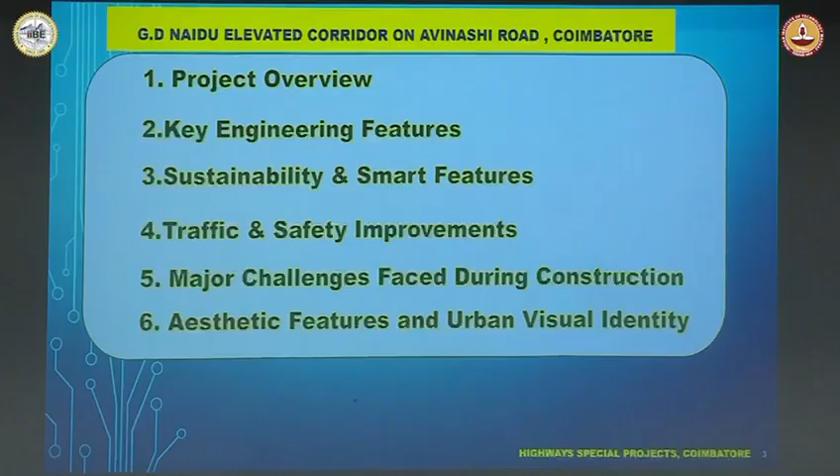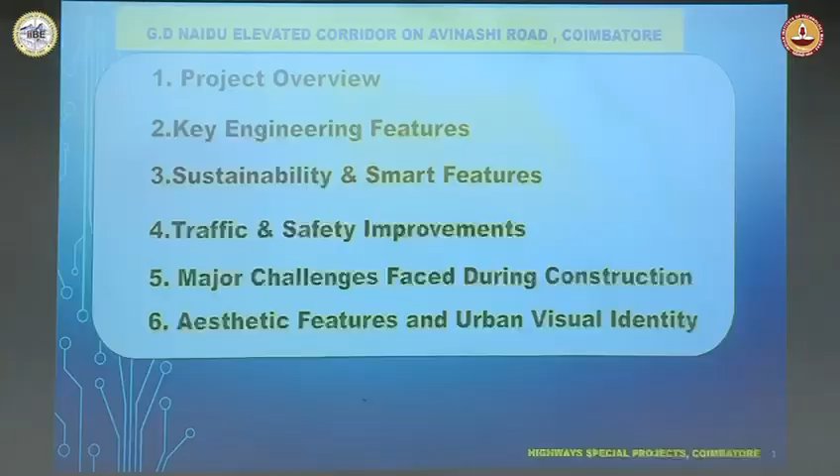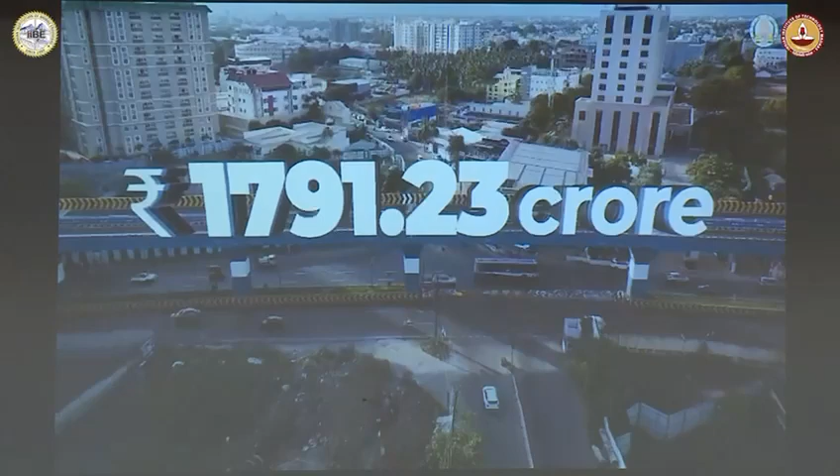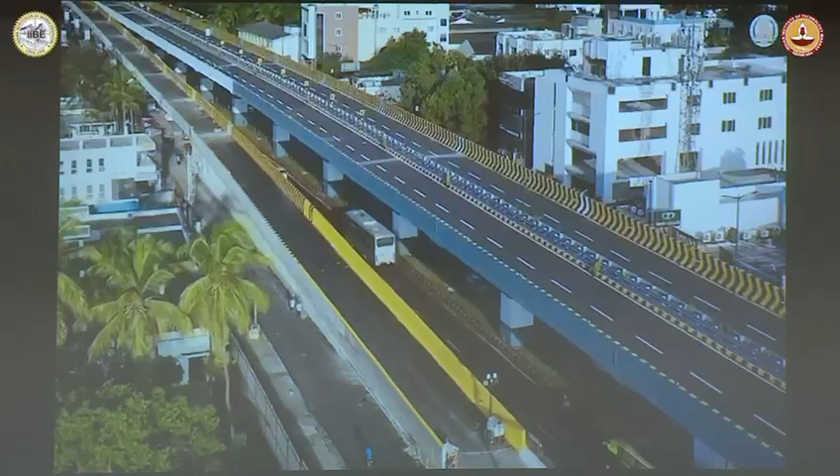Coimbatore, a city that has excelled in education, economy, industrial growth, and many other areas, and has earned several distinctions for itself, is now set to reach even greater heights with the establishment of Tamil Nadu's longest elevated bridge. This project, executed by the Highways and Minor Ports Department, spans 10.1 kilometers from Goldwins to Uppilipalayam at a total estimated cost of Rs 1,791.23 crore. This elevated structure includes a 4-lane elevated expressway and a 6-lane ground-level road, totaling 10 lanes. The flyover has entry and exit ramps at 4 major points: Coimbatore Airport, Hope College, Nava India, and Anna Statue, making it highly accessible.

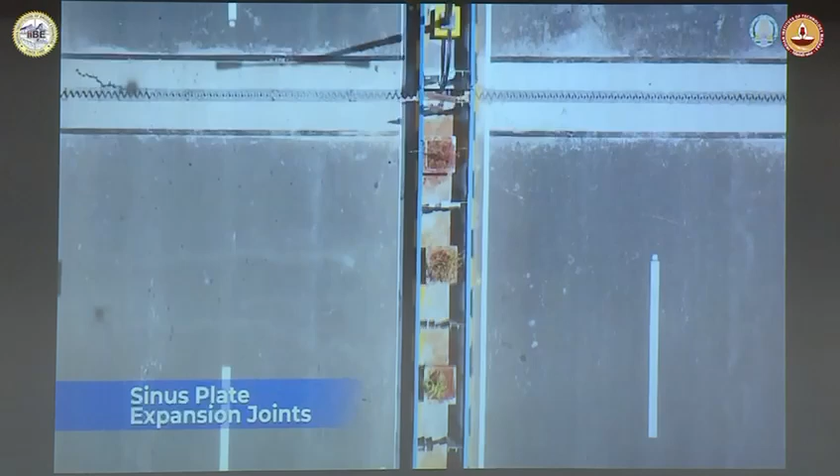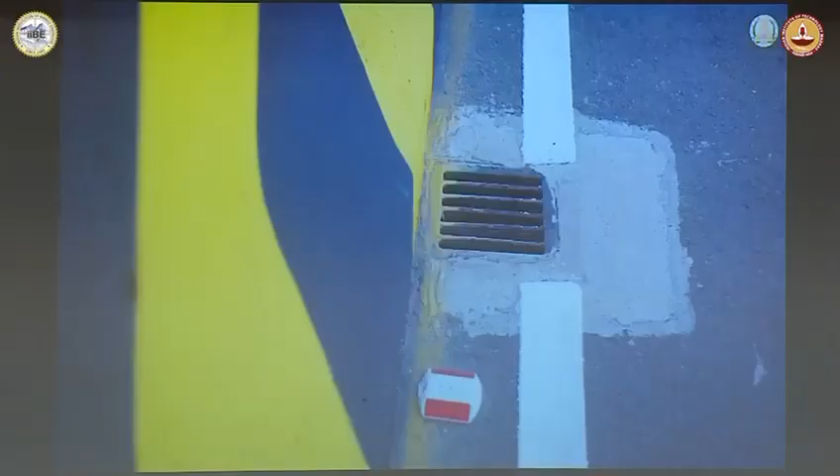One of the key features of this project is the incorporation of advanced sinus plate expansion joints, a new technology designed to ensure smooth travel, reduce noise, and increase vehicle lifespan. The project also includes facilities such as a footpath cum drainage system, safety walls, traffic signs and information boards, roller crash barriers for enhanced safety, electric street lights, and RGB decorative lighting. For the first time in Tamil Nadu, a pioneering rainwater harvesting system has been installed at every span of the flyover to enhance the groundwater table, and a secondary railway overbridge span constructed with steel girder and concrete slab has been built for 52 meters where the structure crosses railway tracks.

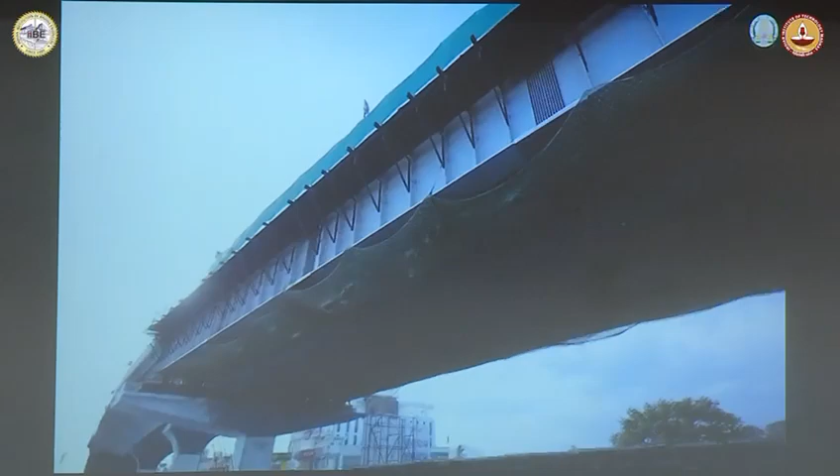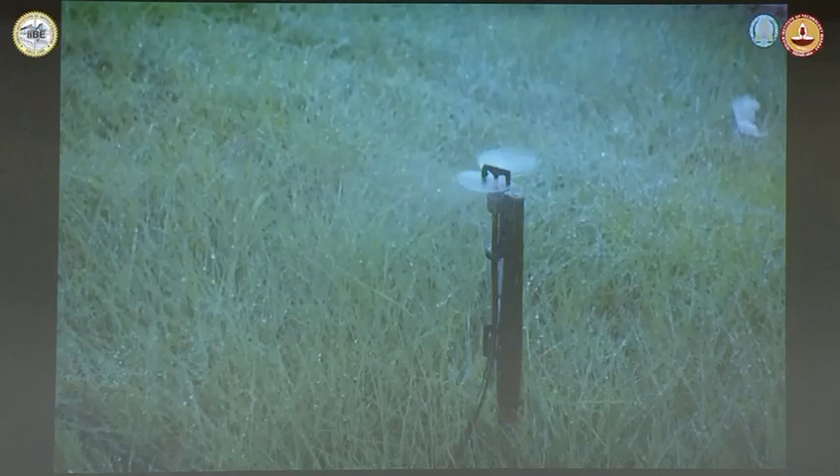To preserve the environment and beautify the city, landscaped medians and decorative plants and grass have been laid between the elevated and ground level roads. These green spaces are supported with drip irrigation systems and sprinklers for regular watering. With all these remarkable features, this flyover is set to become a landmark of Coimbatore. It significantly reduces travel time from the city to the airport from 45 minutes to just 10 minutes. This project will contribute immensely to fuel savings, pollution reduction, improved efficiency, and promote growth in commerce, industry, education, tourism, and medical services. We express our heartfelt gratitude to the Honorable Chief Minister of Tamil Nadu for swiftly completing the construction of this highly special bridge and for inaugurating the flyover by naming it GD Naidu, a close comrade in arms of Periyar's principles and India's Edison, who brought glory through new scientific discoveries. Thank you.

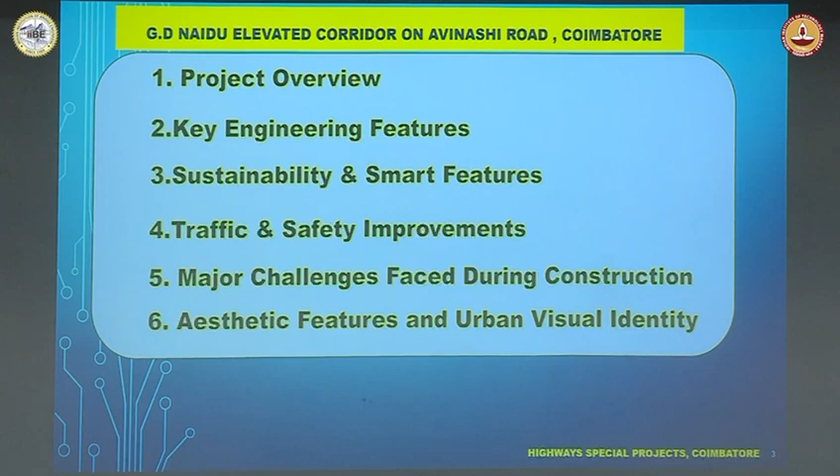Now, in my procedure, rather than discussing the design views, I am going to discuss the project overview and the major features and major hurdles we encountered during the execution of the project. I have divided this into 6 parts: project overview, key engineering features, sustainability, traffic, major challenges, and aesthetic view of this project.

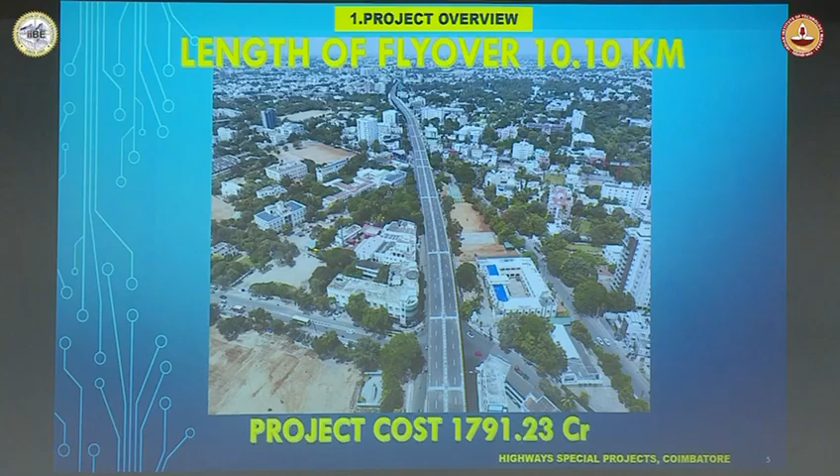Coming to this project, it is one of the longest projects in India, and the longest in Tamil Nadu at 10.1 kilometers, with an estimated cost of 1,791.23 crores. As shown in the AV, the elevated corridor has a top elevated level of 4 laning, and the at-grade levels have 6 lanes, totaling 10 lanes.

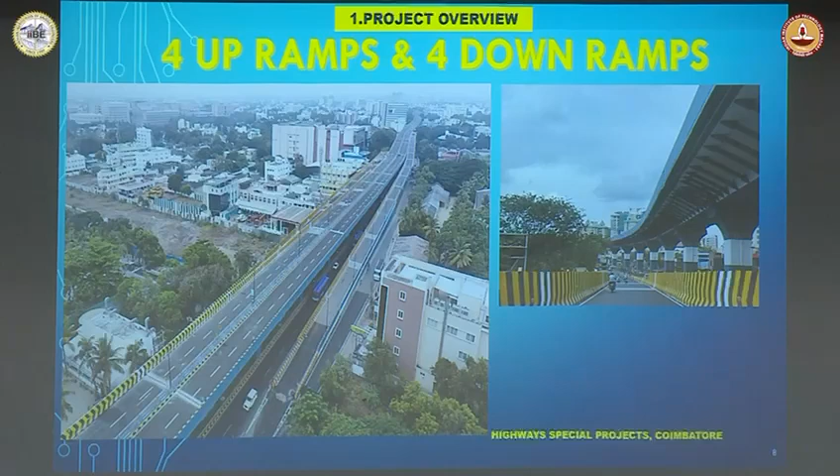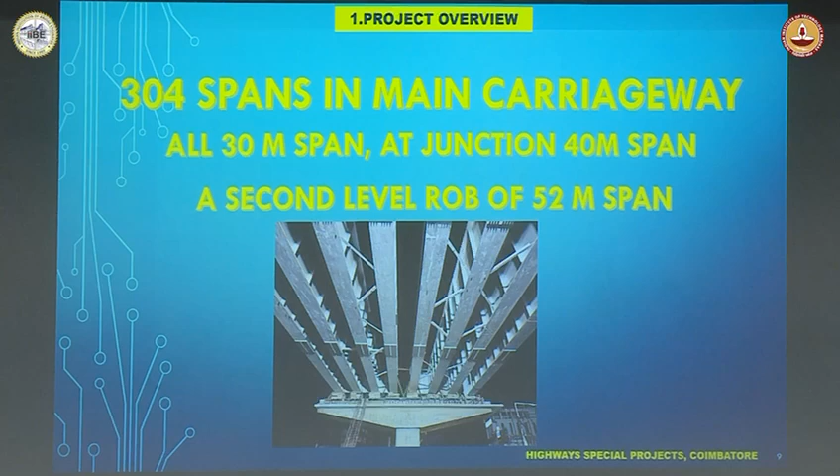We have 304 spans in the main carriageway, and everything is a 30 meter span. All normal spans are 30 meters, and in critical places where junctions are located, we have increased the span to 40 meters. Only at one ROB portion, which is a second level ROB, we have gone for a 52 meter span.

The project started in 2020 under an agreement period of 4 years, but we completed it within 4.5 years and opened the full stretch to traffic, inaugurated by the Honorable Chief Minister of Tamil Nadu during October 2025.

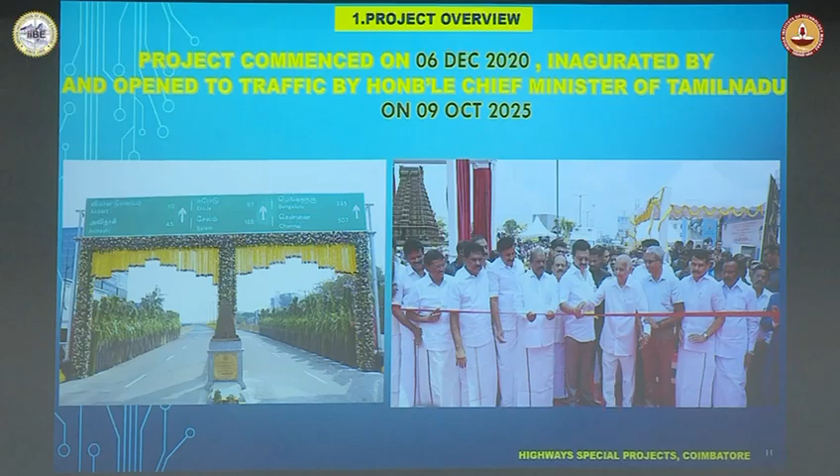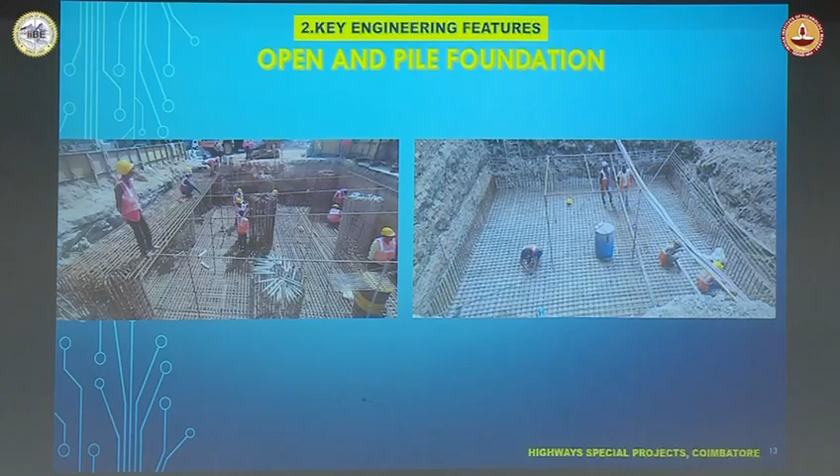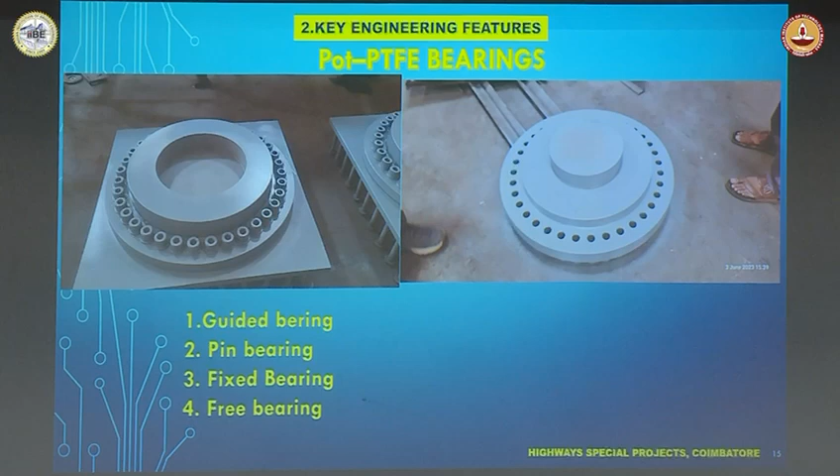Now coming to the key major engineering features, we have both types of foundation, open foundation and pile foundation, as per the subsoil particulars. We carried out pile testing, and for bearings, we have used all types: guided bearings, pin bearings, fixed bearings, and free bearings.

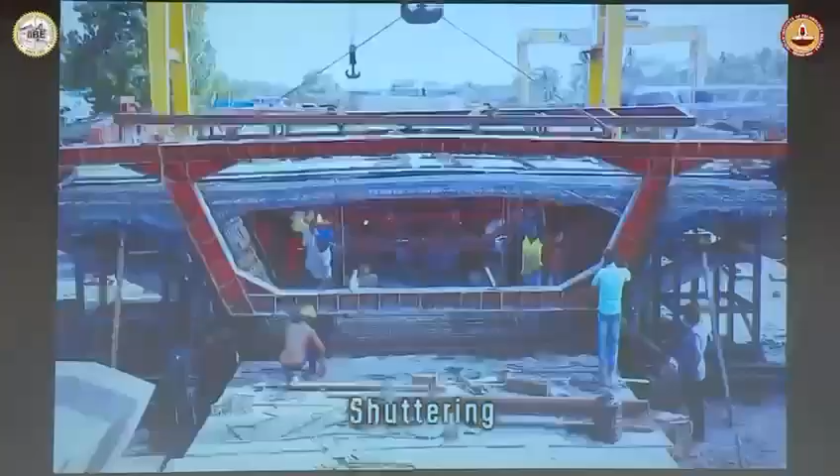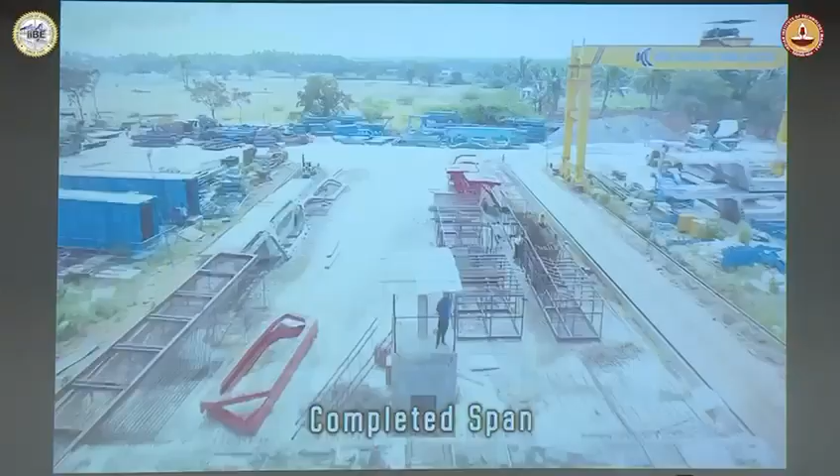This is an AV showing the fabrications. It is made up of a structured box girder, a strutted box girder, already pre-stressed. The total span length is 30 meters, divided into about 12 segments, which were cast in the yard and brought to the site.

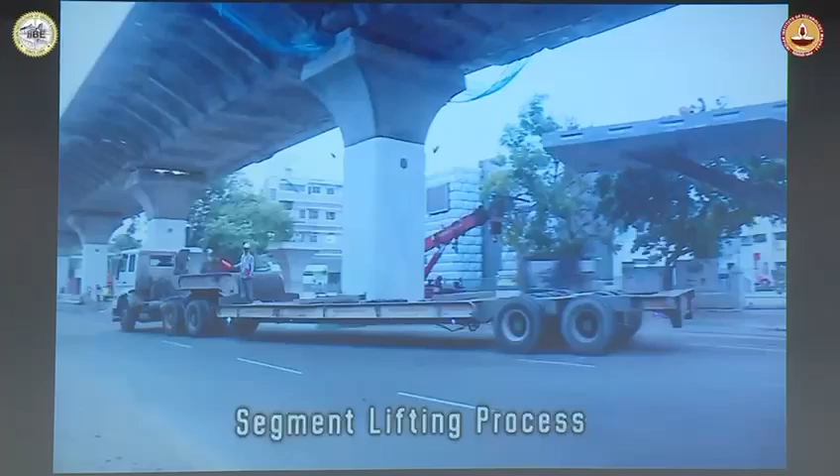This shows the lifting process and this is the transportation of the segments.

Now coming to the major key engineering features, we have the sinus plate expansion joint. Usually, ordinary expansion joints, such as comb plate or strip seal expansion joints, give noise even when the surface is leveled. But here we are using the sinus plate expansion joint, which follows a sine curve, so when a vehicle moves from one deck to another, there is no disturbance or noise at all.

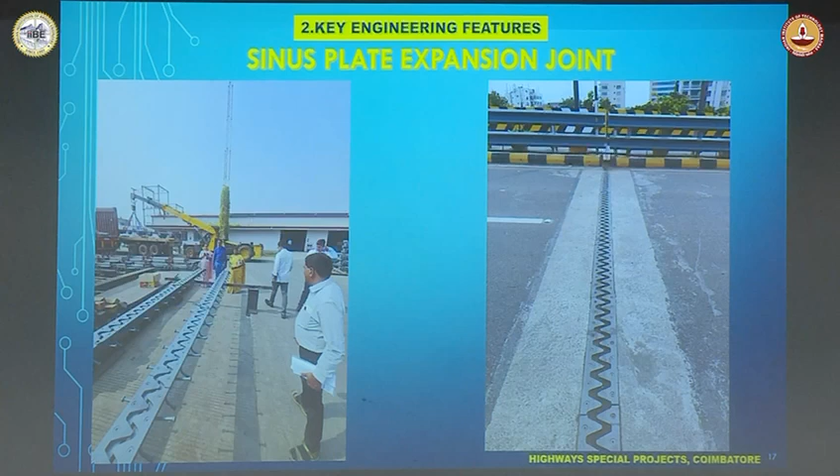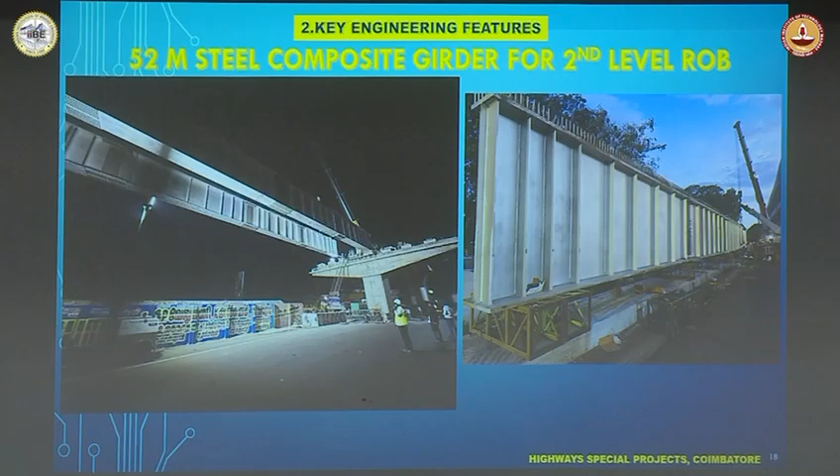Apart from that, we have one span of 52 meters for the railway span, a second tier railway span, using 52 meter steel and composite girders. We also have RE walls for all the ramp portions.

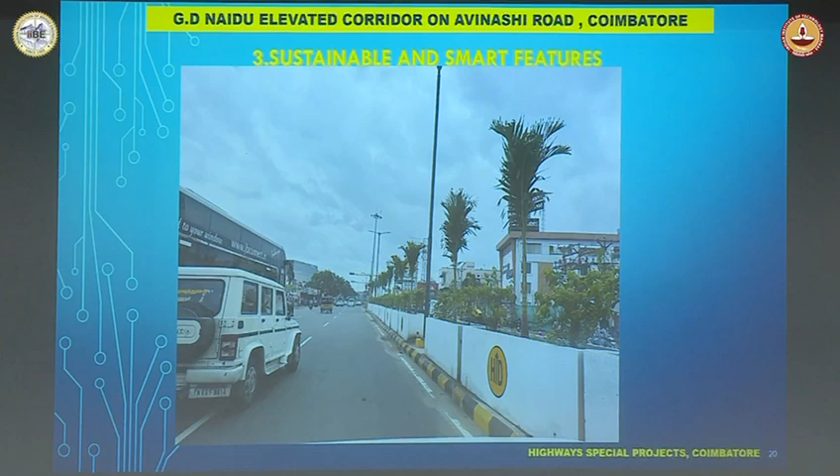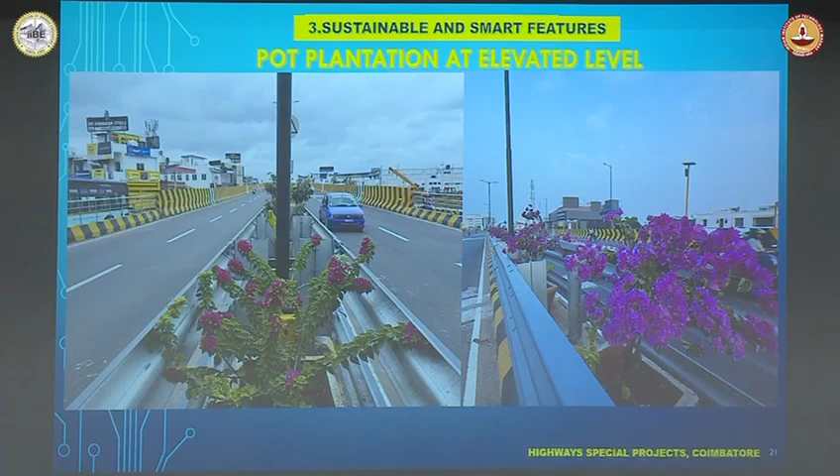Now the next point is sustainability of our bridge. Usually nobody concentrates on sustainability, but we have focused on this. First, we placed pot plantations at elevated levels, around 3,000 to 4,000 pots, and raised plants over them. Also at the at-grade level, we have greenery plantations.

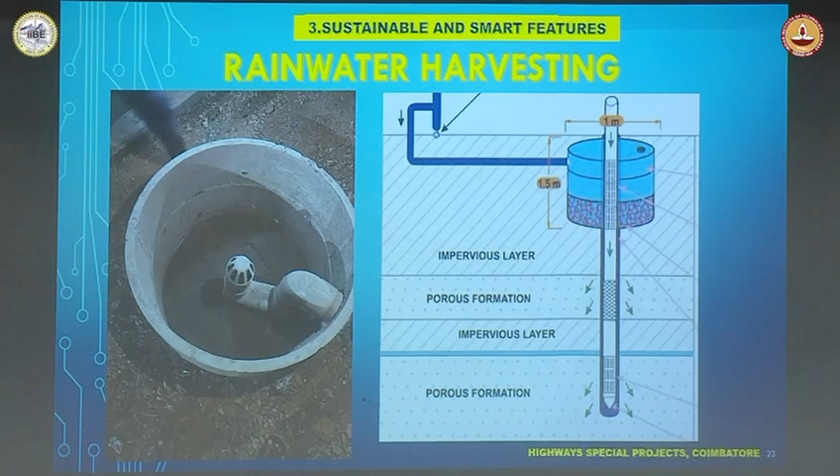We are the first to introduce rainwater harvesting in all the decks of the flyover, placing about 240 rainwater harvesting units, which was recently awarded by the President of India, who gave a memento to the district collector for this.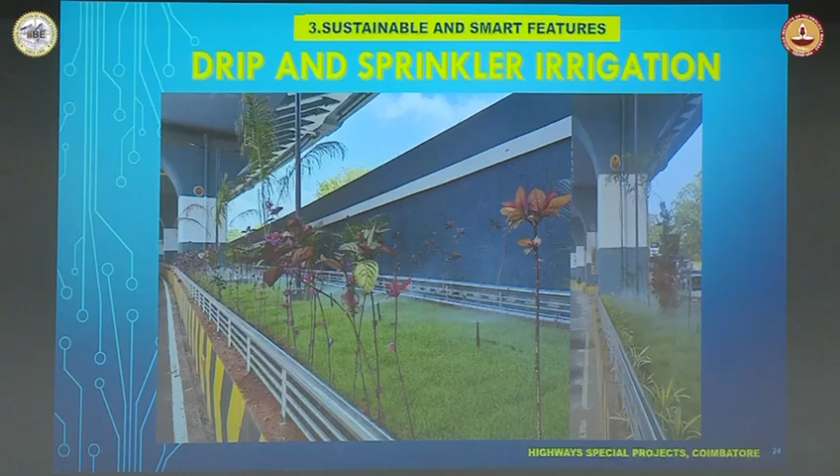Apart from this, we have drip irrigation and sprinkler irrigation to avoid wastage of water, since because of the heavy congested traffic area, placing tanker vehicles is not possible, so we went for drip irrigation.

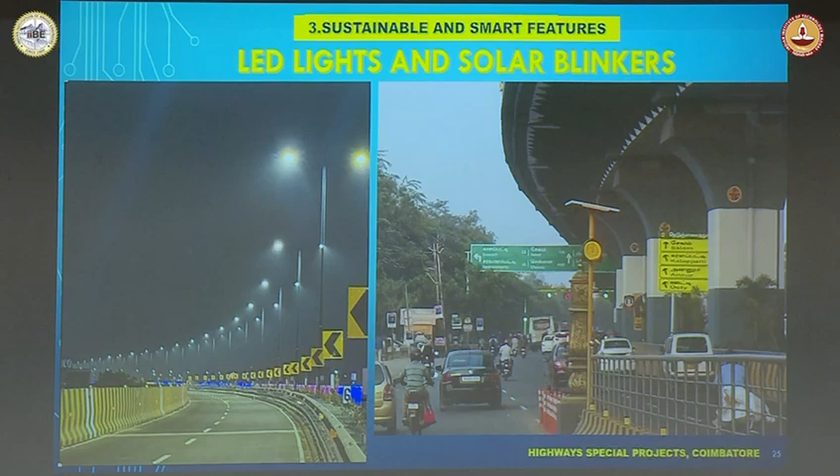Then for sustainability, we use LED lights and solar blinkers. To use electricity effectively, we are using LED lights and solar lights. Now, moving to traffic and safety improvements.

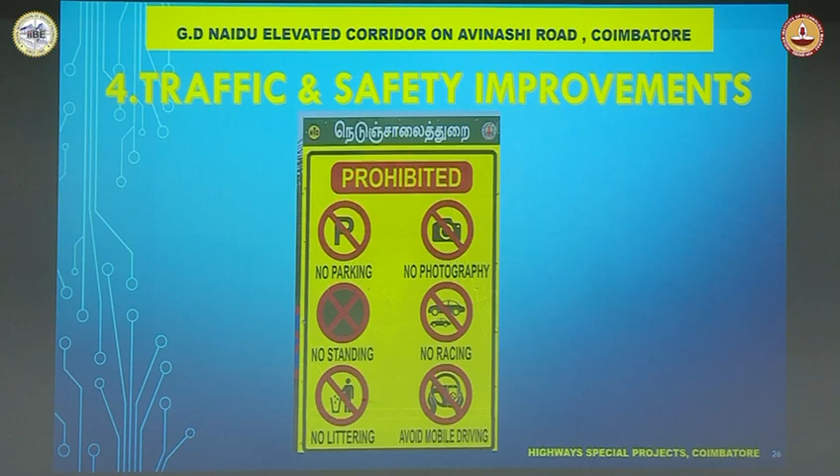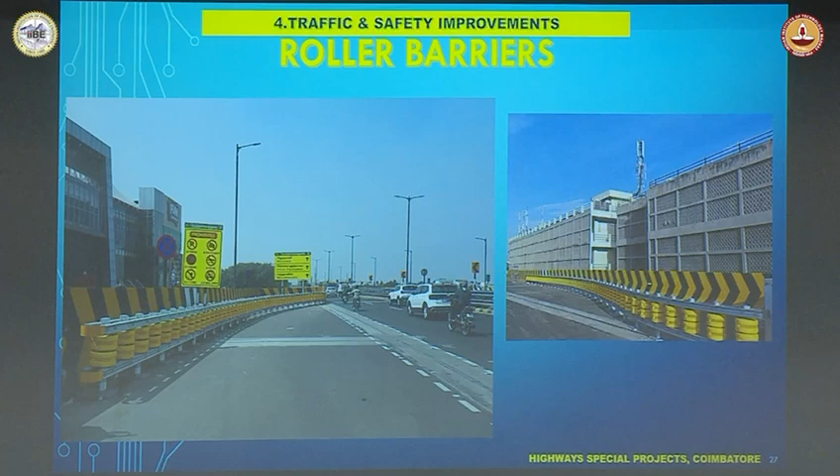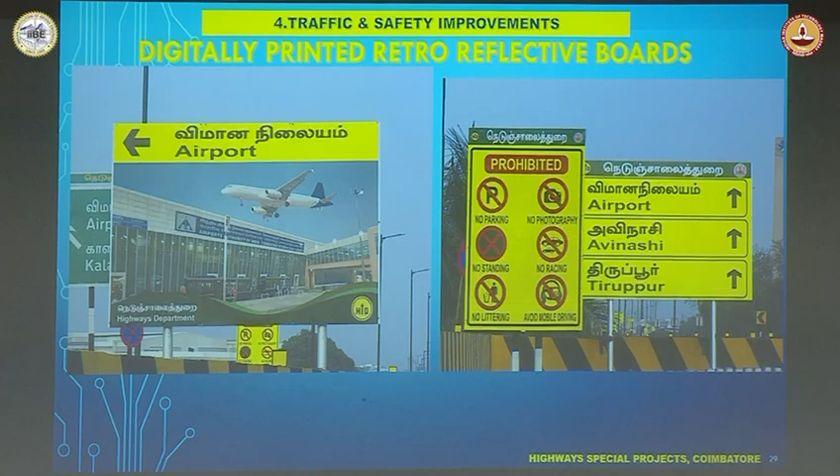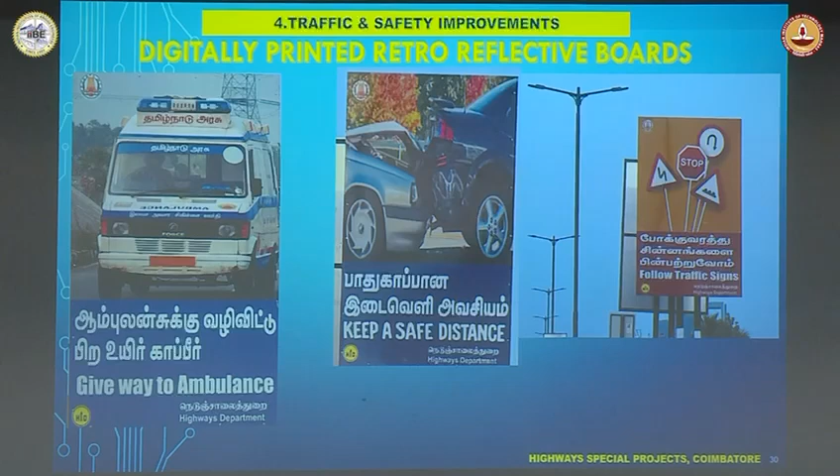Apart from this, we are having high containment crash barriers of 1.5 meters height. We have also provided digitally printed retro-reflective boards for easy night and day visibility, visible even from 500 meters distance. So for ambulances, they keep a safe distance using these information boards. All are retro-reflective digitally displayed boards we have placed. Apart from that, we have done chevron boards and reflective markers for night visibility.

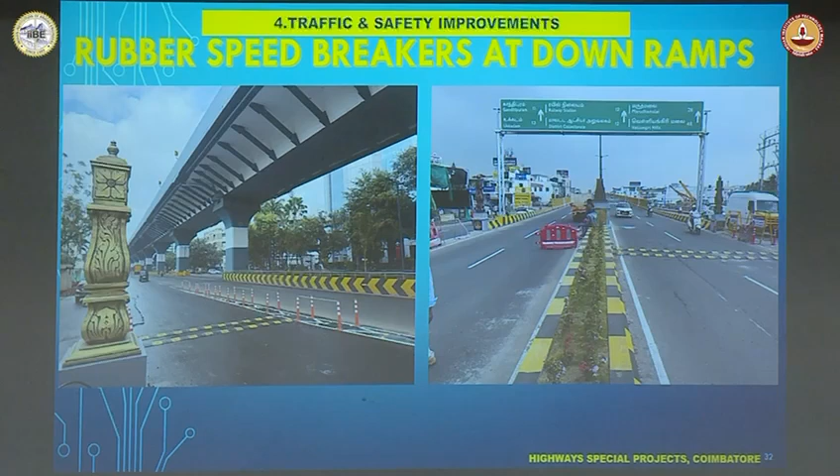Then this is a rubber speed breaker, which is a temporary arrangement, and we are going to provide an artificial intelligence camera over this very shortly.

Then the challenges - the main thing is there are so many challenges because it is a densely populated area. The first one is a land acquisition issue. Before that, so many court cases were there, but we have succeeded in all the cases, and we have completed the cases and started the works.

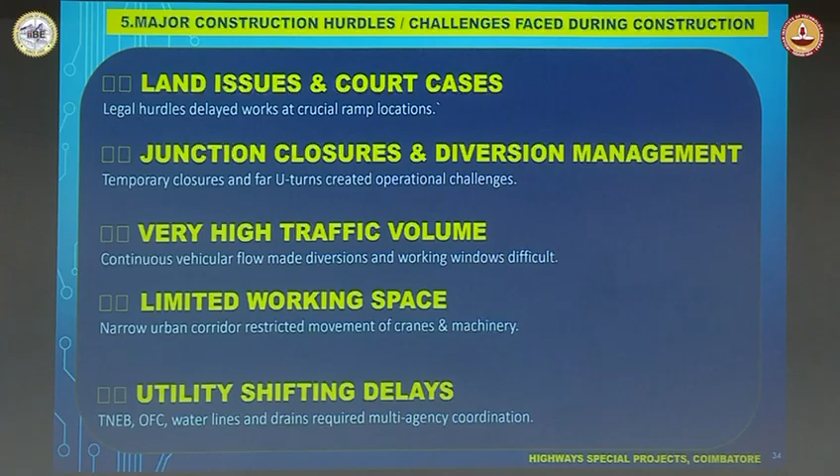Then due to junction closures and high traffic volume, limited working space and utility shifting delays, we have faced challenges and overcome everything. Also during night work and COVID-19 safety, girder launching, and approval from railways, we had so many hurdles, but we have undertaken everything and succeeded easily.

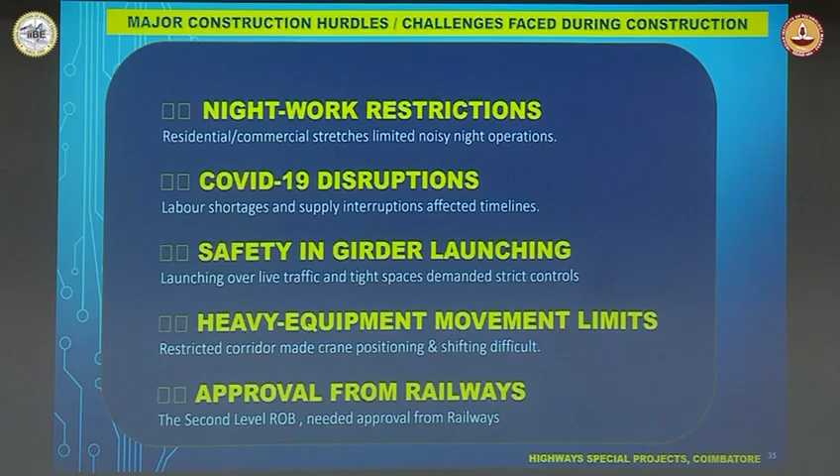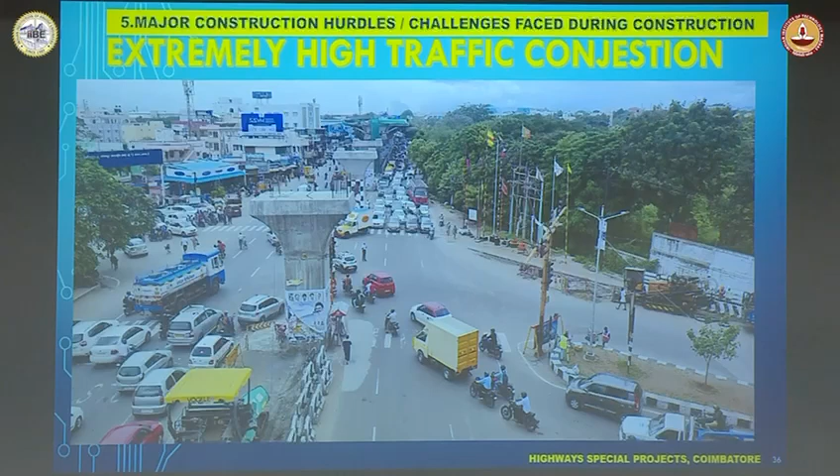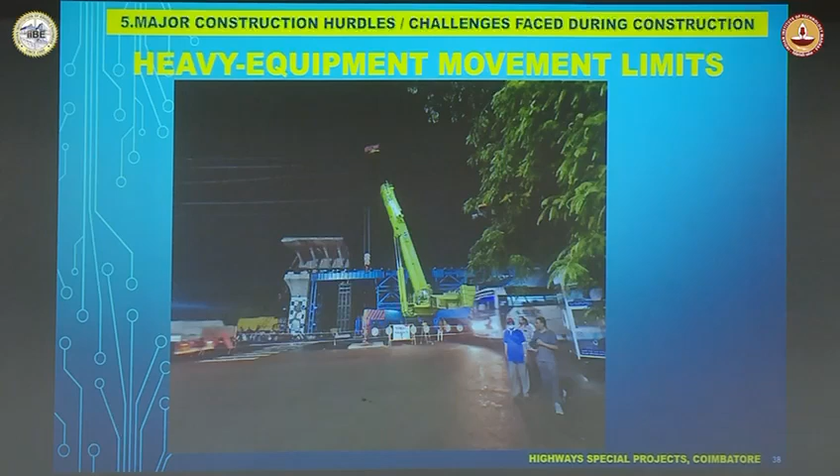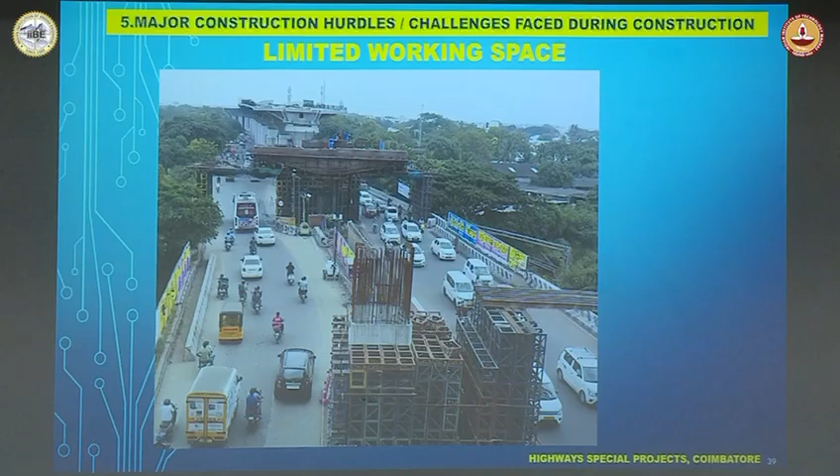So these are the heavy equipments. Actually, we cannot place the equipments in a correct position because this is only a 3 lane road and traffic is flowing 24 hours a day. Even at night, 1 o'clock or 2 o'clock, there will be heavy traffic. Then limited working space - actually we don't have much working space, very limited, but within that space we could succeed in everything.

This is launching over the traffic. And another main thing is, if you look at this, whenever we are digging, we have so many cables and all. So we overcame everything and transported them - actually we have shifted the cables and done all the works.

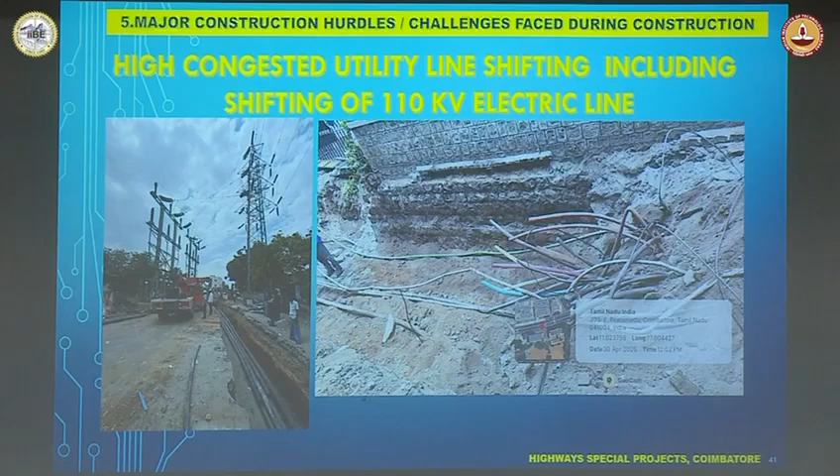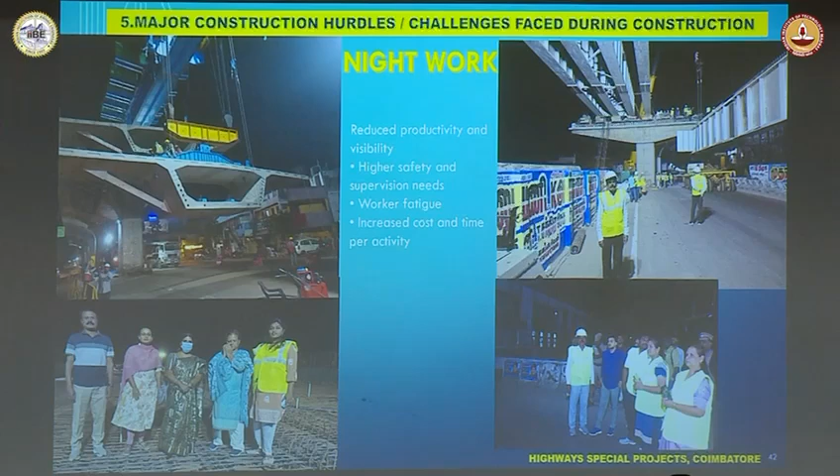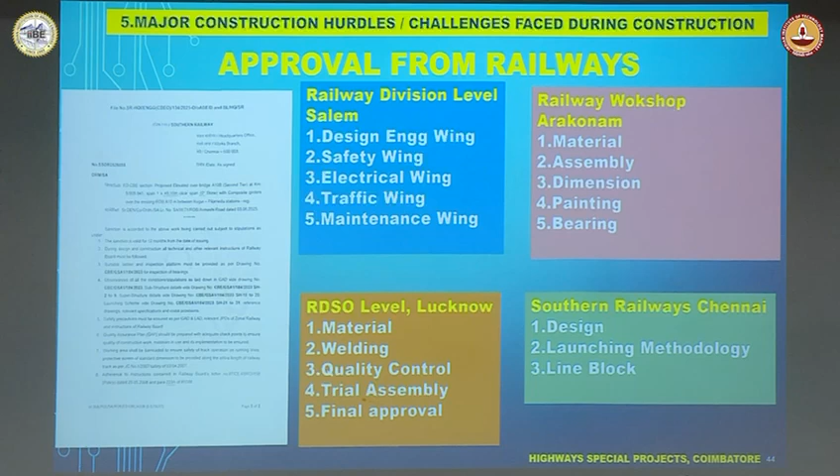And the main thing - another thing is we have to get the approval from railways. That is a very tedious thing because we have to follow so many procedures. We have to get permission from RDSO level, Salem level, then Railway Workshop, Arakonam, and Southern Railway Chennai. So we have got approval from railways for the second level elevated corridor, all the ROB portions.

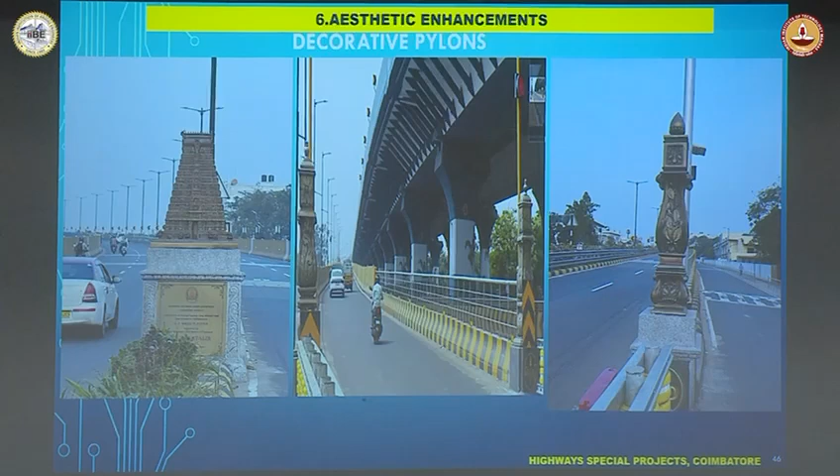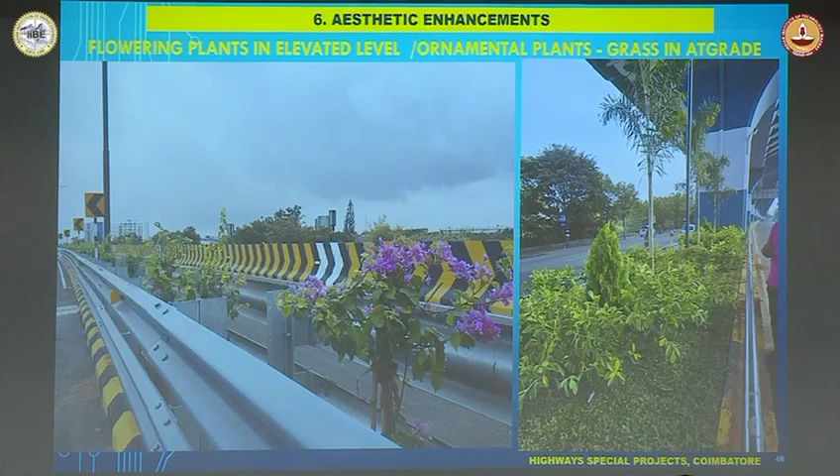So not only safety and technical points, we have to also consider aesthetic enhancements. We have provided decorative pylons for the first time here. These pylons depict the traditional culture of Tamil Nadu. We have placed some Gopuram pylons at the center, and at the border edges we have placed some decorative pylons and pillars, along with attractive color paintings. Then aesthetic flowering plants and elevated, ornamental grass and everything we have done. During night times it looks very nice because we have done RGB lighting in selected places at the junction points.

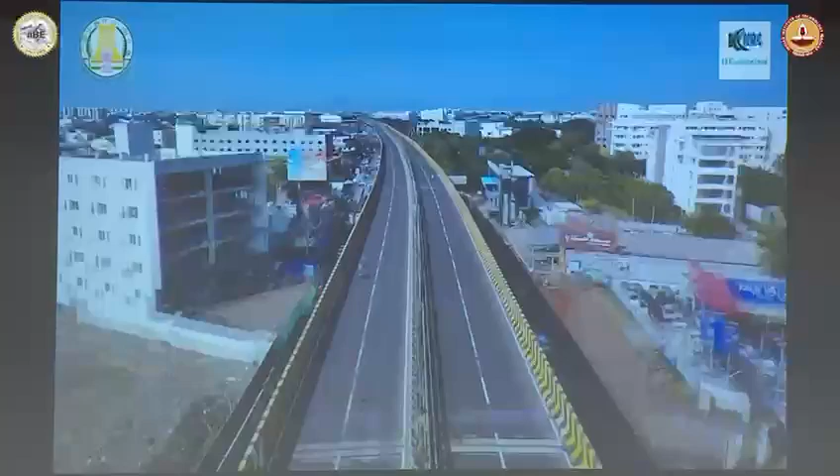So we are going to end after that with the final AV. This is the finished audio visual of our elevated corridor, daytime.

I said 50 minutes. I have completed correctly - the alarm is ringing.